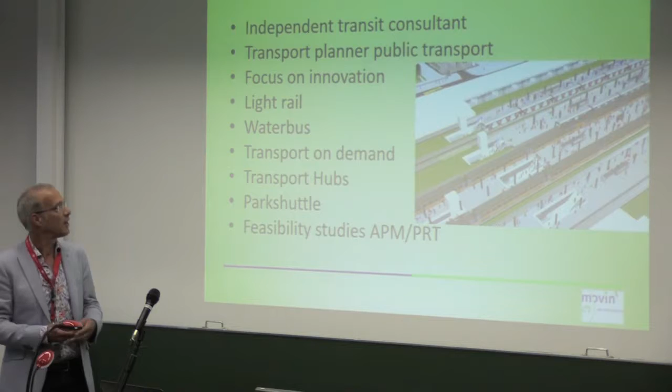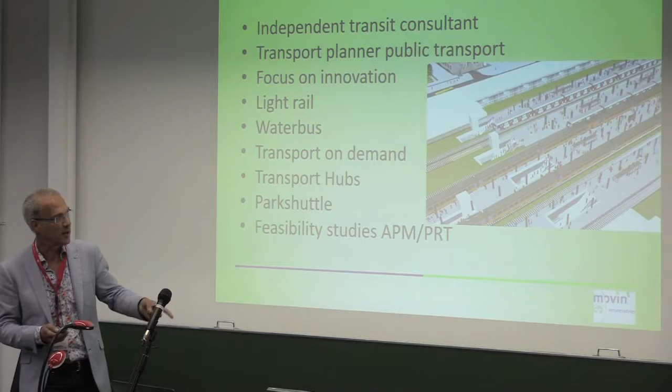Okay. Short introduction of myself. I work as an independent consultant in the Netherlands, doing a lot of transport, maybe most of the time public transport related studies. This is an artist's impression of the new Amsterdam South Station, with simulations of the number of people on the platforms, whether they are wide enough, etc.

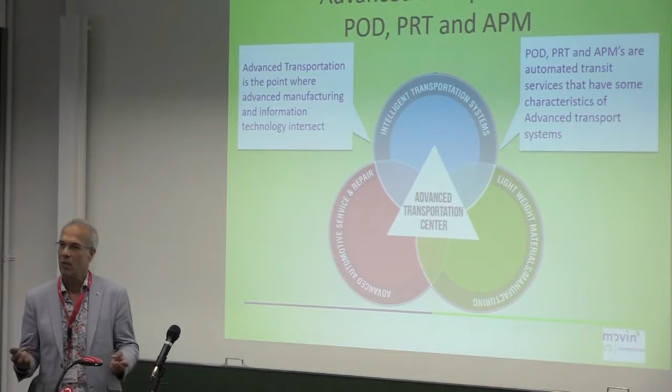Okay, then back to advanced transport. Well, there are different kinds of advanced transport systems, and there is a slight difference between advanced transport and pods, PRT and APM systems. The Advanced Transportation Center has this kind of definition: it's a point where advanced manufacturing and information technology intersect. So it's more than just a vehicle. It is also about lightweight materials, maybe 3D printing, modern manufacturing, sustainability, etc.

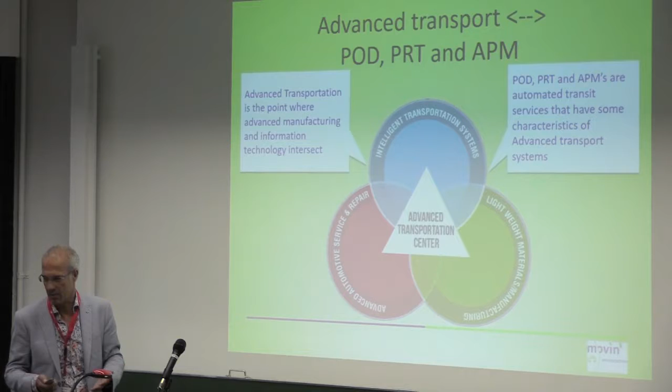Pods, PRT and APMs are automated transit services that have some characteristics of advanced transportation, but also some characteristics of route-based, scheduled public transport systems.

Well, it starts with a dream. Why dream about automated transit? You all know that already. Driver costs are quite high. When you have it automated, you have less limitations. The driver has to drink coffee, that kind of stuff. You can also offer a better quality of operations, punctuality, higher performance, and shorter waiting times for the passenger, because you make the system for the passenger. And the technology is there to make this passenger happy and to earn some money on it.

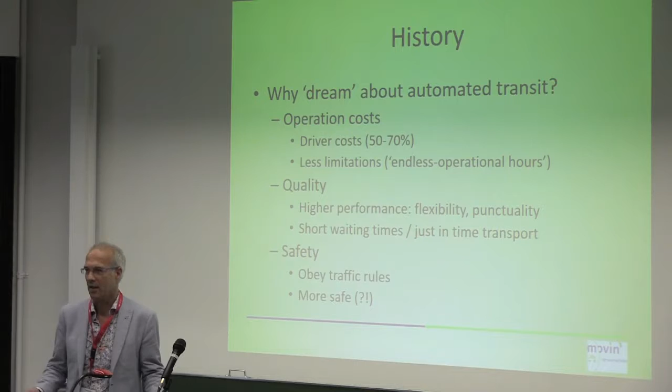Safety is an aspect. You have to obey traffic rules. People who are driving a car are not always obeying traffic rules, so the idea is that an automated system would be safer.

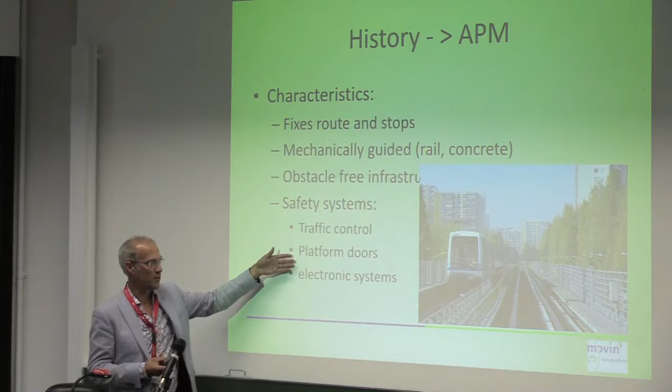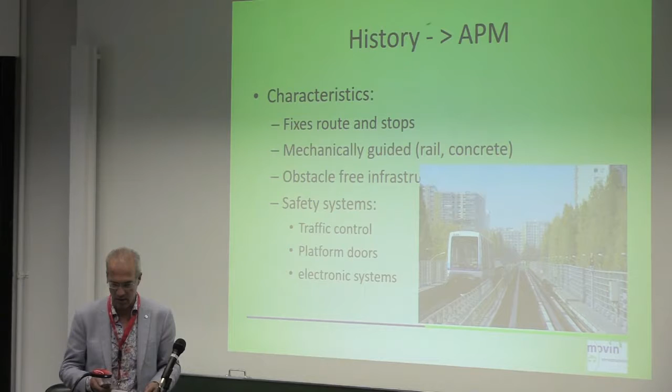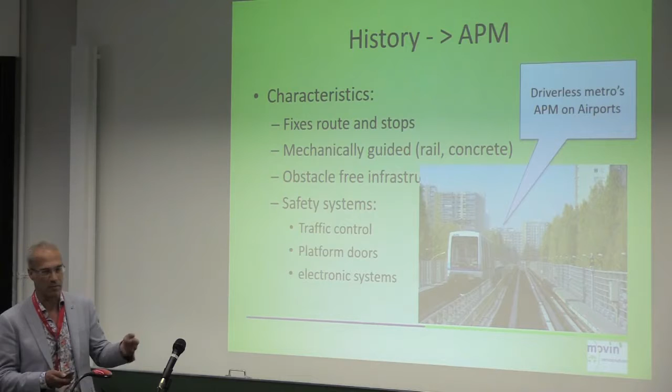When you look at the history, this is an APM, automated people mover system. Characteristics are fixed route, stops, mechanically guided, you need obstacle-free infrastructure, and you have of course some safety systems, a traffic control system. Most of the time you have platform doors, and electronic systems, sometimes obstacle detection systems and other electronic systems used to keep the system safe. Main systems are at airports, and there are some driverless metros, like this one in Toulouse in France.

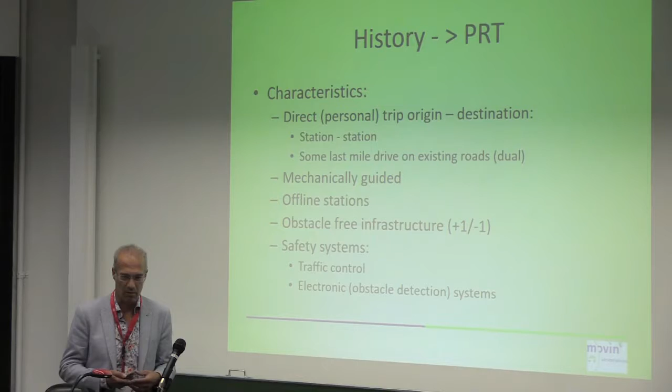Then you have PRT, of course. Characteristics: direct, personal trip, origin to destination. Most of the time it's planned as a station-to-station situation. There were also in the past some PRT systems that were dual mode, so they could use dedicated infrastructure and also partly use roads. Most of the time it's mechanically guided, offline stations, you need obstacle-free infrastructure, and you need of course the safety systems.

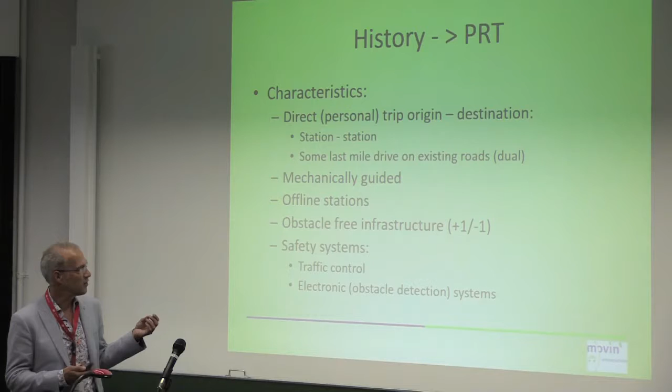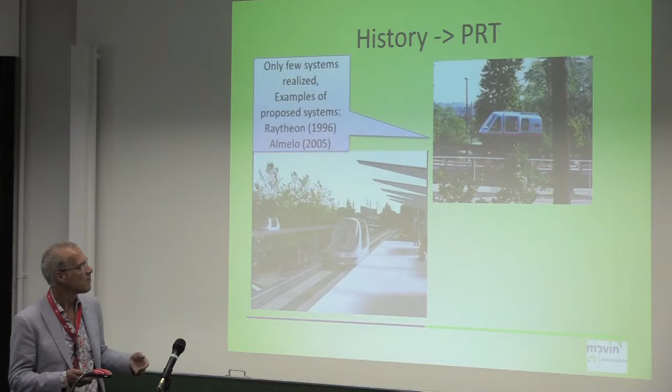Here are some examples from the past. You have Raytheon, which worked on a PRT system in the US in the late 90s, and this is a rendering that was made for a system I worked on in Holland. It's in Almelo, a city of about 60,000 people, and it was back in 2005.

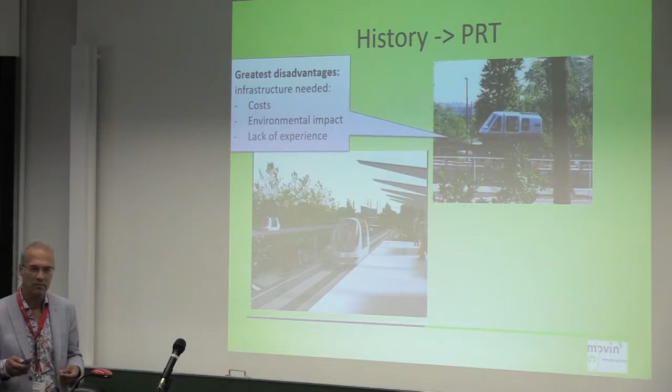The greatest disadvantages of PRT, in my opinion, are that you need quite costly infrastructure. There is also the problem of the environmental impact of infrastructure. Most city planners don't want elevated infrastructure in their city. And of course there is what I call a lack of experience. What I mean is not that we don't have a lot of experience with planning PRT systems, but there is no PRT system at a scale large enough to accommodate and replace existing car trips. So that's still a point for the future.

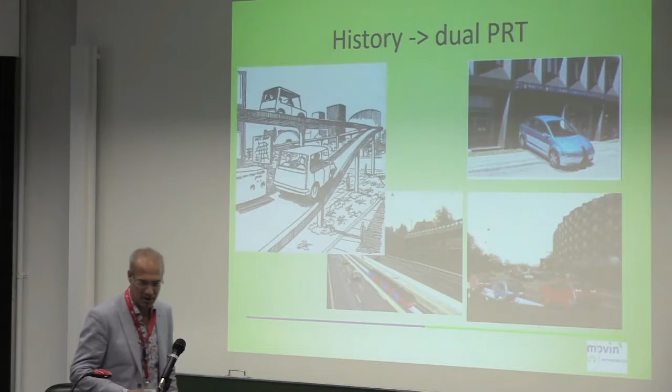Back in the 70s, and this is a drawing I found in a book from 1970, there was a kind of dual mode autonomous driving on concrete infrastructure, but it could also drive on ordinary roads. This is a system, the RUF system, from Denmark, that's been worked on for a very long period of time. The main issue with that system, and you can see it here, is that you have a kind of V-shaped space in the vehicle, so it could fit on the infrastructure.

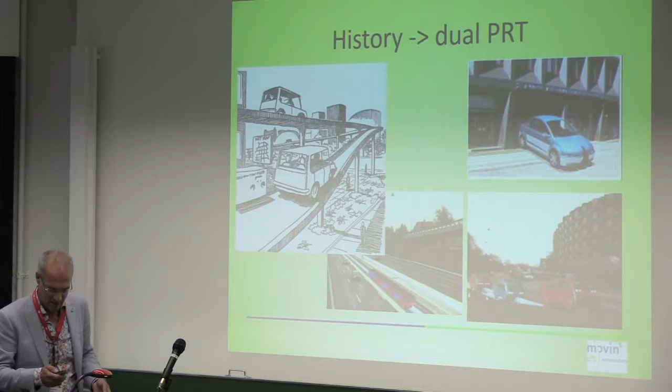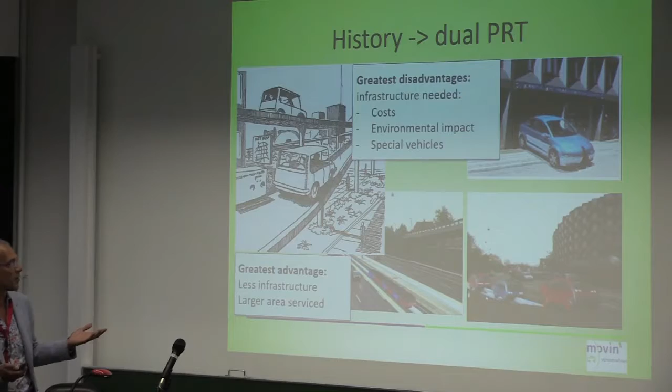Dual mode PRT is able to move in existing streets too, so that could make a more dense network. People could even drive to their home with the PRT system and use it back to go to another place, partly using dedicated infrastructure. So, the problem is that you need special vehicles, and you also have the costs and the environmental impact of the infrastructure, but less than in the non-dual mode PRT systems.

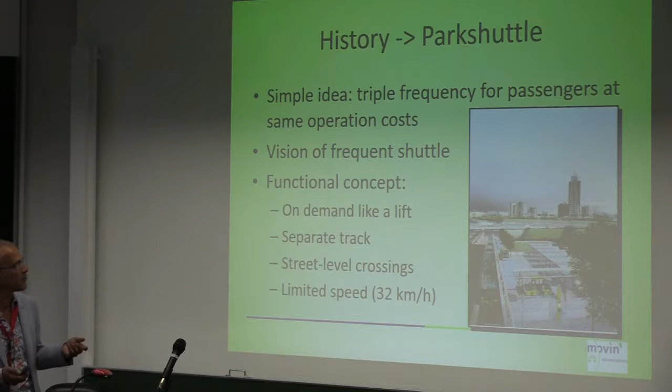Well, Parkshuttle started actually with a simple idea. We wanted to triple the frequency for the passengers at the same operation cost. That was the idea behind the system, and it was a vision of a frequent shuttle system. Functional concept like on demand, like a lift, separate tracks, street level crossings, and limited speed.

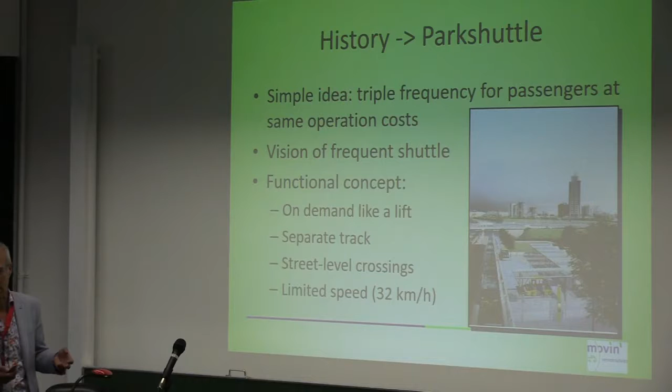And what especially was a topic is the deceleration of the vehicle. What should you do when something occurs? How fast should you stop? How fast can you stop? You can hurt the person in front of the vehicle, or you can hurt the passengers in the vehicle. What decision do you take? That kind of discussions we made. I think that this discussion will still remain.

Also social security, what we call in Holland, that is, do people feel safe and comfortable. Can women use the system safely, also at night, and do they feel comfortable and safe? Safety on crossings, and the accuracy of driving and stopping, and of course the traffic control system. These are also topics that we have discussed. Due to time, I won't go too detailed into that.

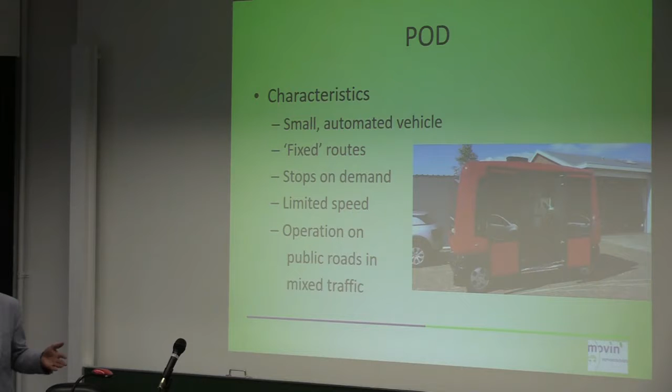Which standards should we meet with the vehicle? Which requirement specifications should we make? Is there allowance from the city? Can we insure the vehicle so that we can transport people with it? That kind of aspects. Then we have, of course, nowadays also pods. Characteristics, yeah, you know already. So, limited speed operation on public roads in mixed traffic is the goal, but well, with some limitations it's possible, but it's still in a pilot phase.

When you look to public transport, you always have the economic need to combine travel needs, because it's too expensive to transport all people directly. Otherwise you would have a kind of taxi system. So you combine travel needs, and the idea is that you have routes where a lot of people travel, and then you can combine 20 people in a bus, or maybe 200 in a tram, or maybe 1,000 in a metro system. But the disadvantage for people is that it's not always the shortest route. It's not a direct trip for a lot of people. Some have a direct trip, but you have to change at hubs.

You need stops, and people have to walk or bike or go by car to a stop. And you have, of course, scheduled trips, so people have to check their mobile phones, what is the departure time of the trip I want to take, and have waiting times, of course.

Well, the typical public transport network has more frequent routes. That's the backbone of the network, most of the time the metro system, or the light rail, or the bus rapid transit system, and has less frequent routes, often partly parallel to the more frequent network. In my opinion, the opportunities for pods lie in bringing more people to the frequent network. So to create feeder systems to the frequent network and increase the quality of the network. Then you can replace longer and less frequent bus services by short pod routes, and create a more efficient network that is also good for the customer.

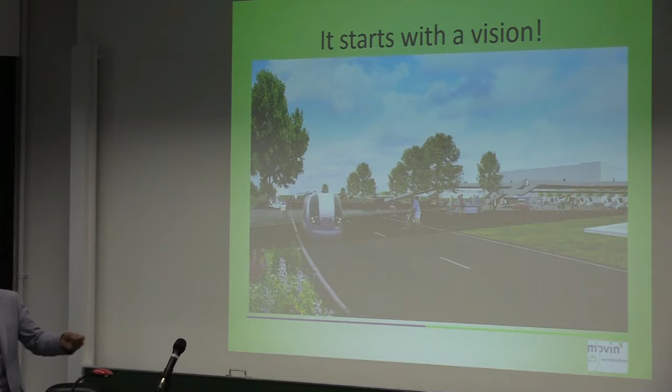And most important, and you are all visionary people here, is that it starts with a vision. This is a visual I made for 2060 on the design challenge in Holland, and we drew kind of pods. There are a lot of pods here waiting for people, and this is a kind of hub at a station in Holland, and we discussed a lot about whether these pods will be short trips only, or could they replace the train system too?

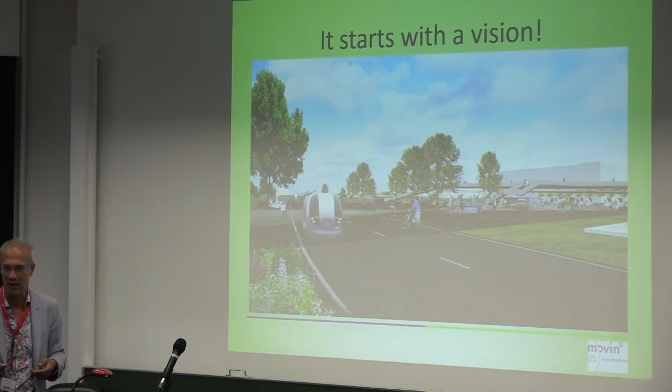Well, my vision is short shuttle services, start small, anticipate to grow, but think about growth. Be creative and flexible. Involve municipalities, citizens and operators, and be persuasive, because it takes a long time. Communicate well and openly. And try. Accept errors and then succeed. That's my presentation.